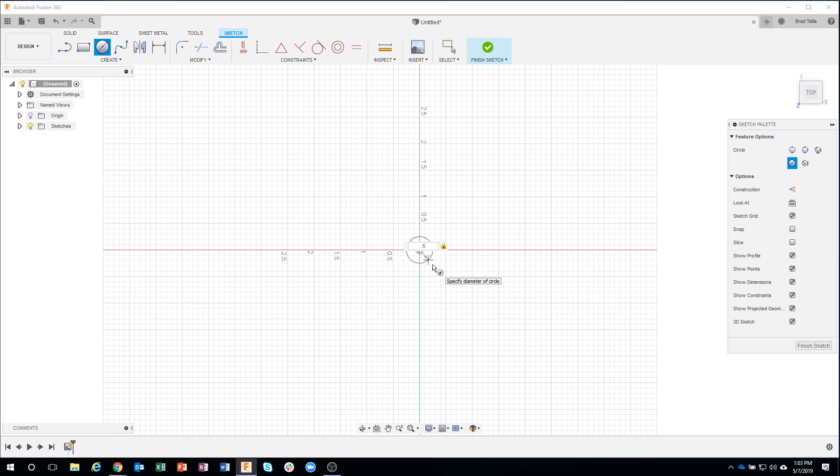So the first thing I'm going to do is, let me jump into Fusion. And I'm just going to start by creating a quick sketch. And I want to create a 1/2-inch diameter bolt, for example. So I'm going to start by just creating a circle. And I'm going to make this 0.5 in diameter. So I type in 0.5, I'll say okay. Let's go ahead and extrude this guy up. And in this case, I'm just going to go like 1 inch, for example. Okay.

Under the Create menu, we have this Thread command. And when I click on Thread, I can go ahead and select this cylinder. Now watch what happens when I do this. So you'll watch what happens over here. When I click on this cylinder, it actually figures out the closest manufacturable thread. So for example, in this case, I'm in inches, but if I were in millimeters, this would probably show up as a metric thread type. You can see that it determined that a 0.5 is about the closest.

And then we have different designations. So you can kind of see we have 1/2-inch 12 UNS, 1/2-inch 13 UNC. So I'm going to go ahead and do this 13 UNC, and you'll see that this preview updates. Let me go ahead and change it to something like 20. You can kind of see how that updates.

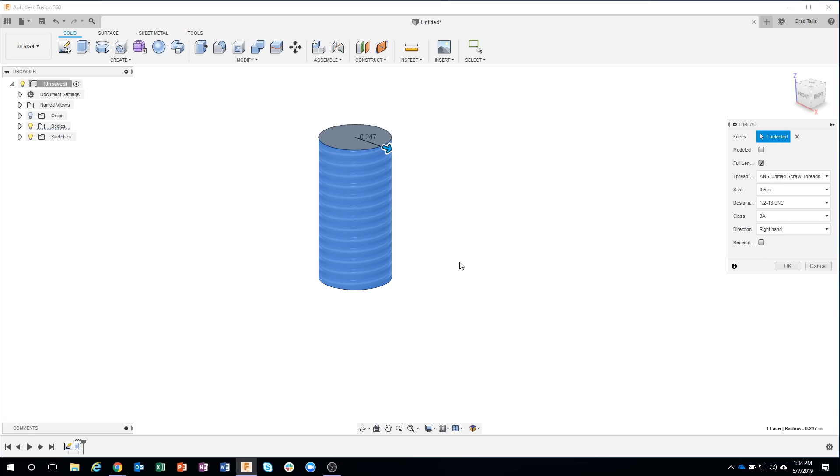Now, if I were to say okay right now, this is just a decal. It's just a sticker, basically, a representation of threads. Now, why would we want to do that? Well, when you have complex designs that might have lots of threads, you wouldn't want to have all of those modeled, but you might want to show that those are threaded rods, for example. So we use this kind of almost like an image.

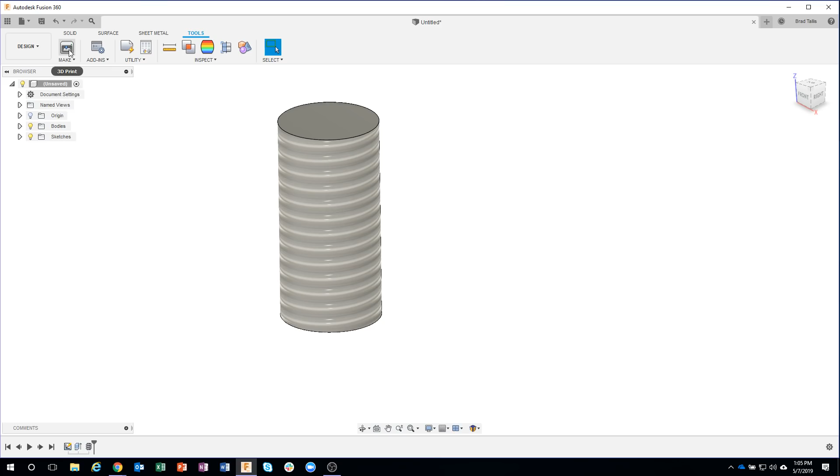However, if I were to come over here and say make and try and 3D print this, all I would get would be a cylinder because there's physically no threads there. Okay, I'm going to go back into my thread feature in my timeline.

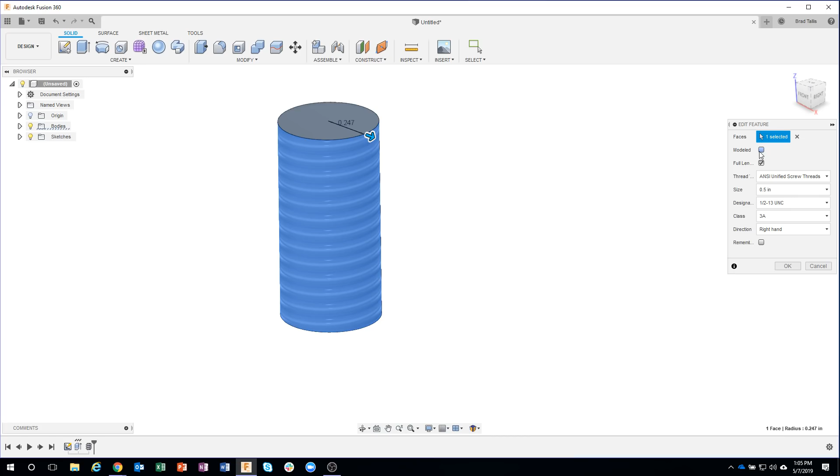Again, I'm ANSI Unified, 1/2-13, but you'll see right here it says modeled. If I click on that, it's going to physically model the threads. Now, by doing that, we've added a lot more edges, a lot more faces, and this is what I was talking about earlier. If we had a lot of these in our design, it could potentially slow down our session of Fusion. So actually model the threads only on the ones that you really need to have modeled.

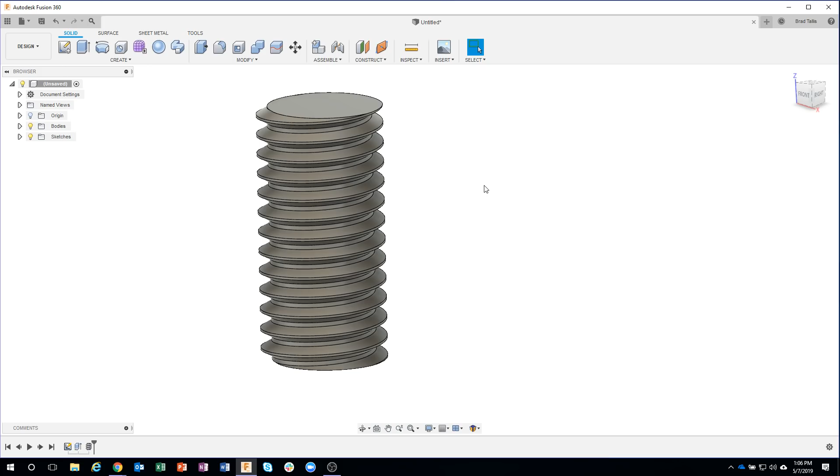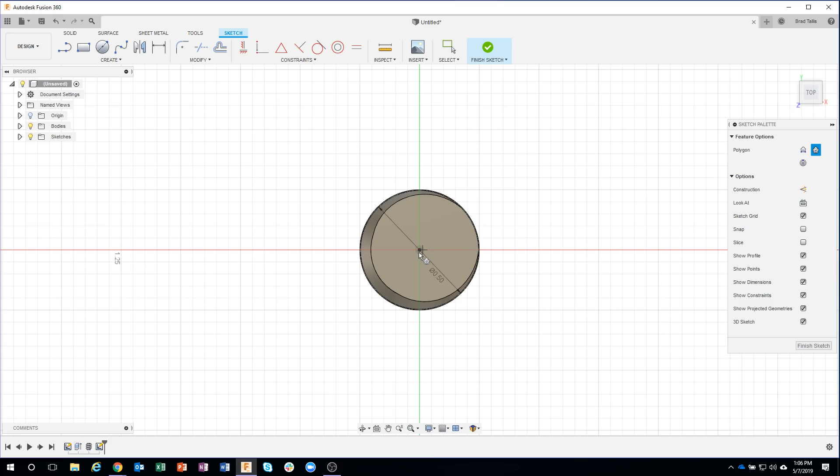Okay. So I'm going to do that again. This time I'm going to create a sketch on that plane. I'll do another circle here. Let's just do a half inch. And then I'm going to use a cool command in here called polygon, circumscribed polygon. What this allows me to do is start in the center, and you can see that it's going to basically create a polygon that's circumscribed around the radius of our circle here.

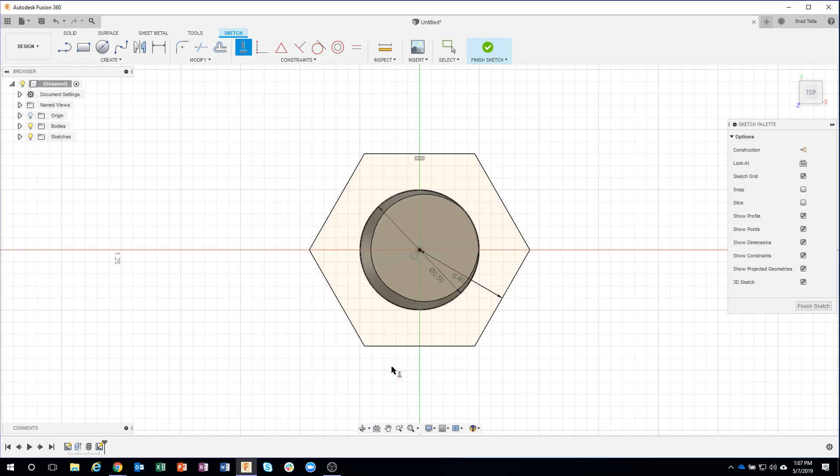So now I can make this nut whatever size I want. Let's just say 0.4 in this case. I'm going to go ahead and just hit enter, and you can see it created a 6-sided polygon. Now, the anal retentive part of me likes to have this horizontal, so I'm going to come in here and say horizontal, and I'll just click on that top edge, and you can see how it rotated it to be horizontal, and we are done with our sketch.

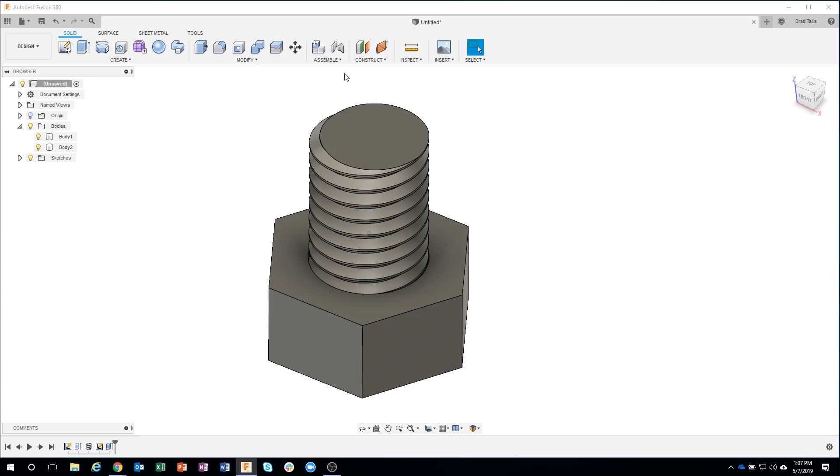I'm going to go ahead and turn this body off. Let's go ahead and extrude this up. Let's just go maybe 0.375 in this case. I'll say OK, and I'll turn this body back on. Now, if I were to section through here, we're going to see an issue. So I'm going to say section analysis, and let's just slice through. And you can see that sure enough, I have the threaded rod, but the nut itself is not threaded.

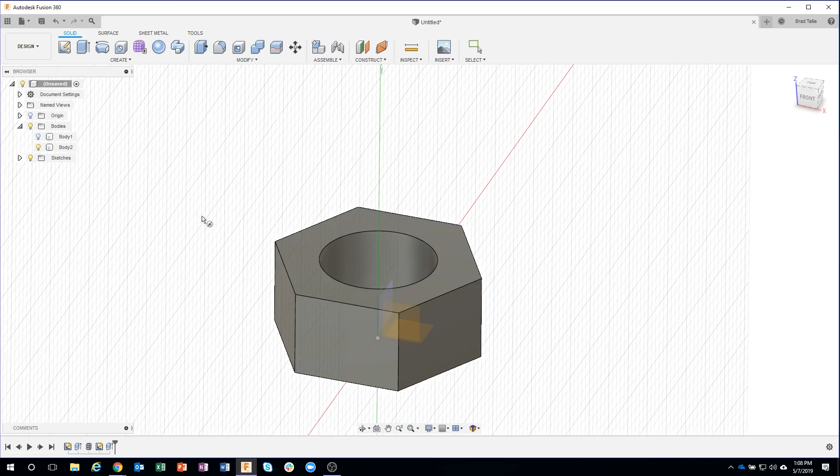So let's go ahead and do the exact same thing. I'm going to say create a thread. Notice size is set to auto, designation set to auto. I'm going to click on that circle, and check this out. I'm going to undo so you can kind of see this. Watch the size of the circle when I do this. Oops, I meant thread, not coil. So watch the size of the circle. As soon as I click on that circle, you see that it actually got smaller. And that's because Fusion is smart enough to figure out how to make it the drill size ready for the tap. So it does all of that for you.

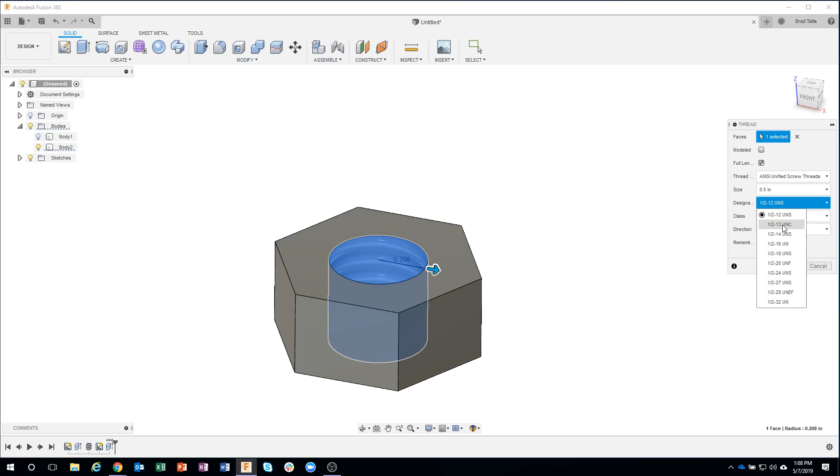So again, half inch. Now I want to make sure I'm doing the 1/2-13. And again, I'm going to say modeled because I'm going to 3D print that nut. I'll say OK, and we now have this nut. Let's go ahead and turn this back on again, and I'm going to section through it. Okay, so something like this.

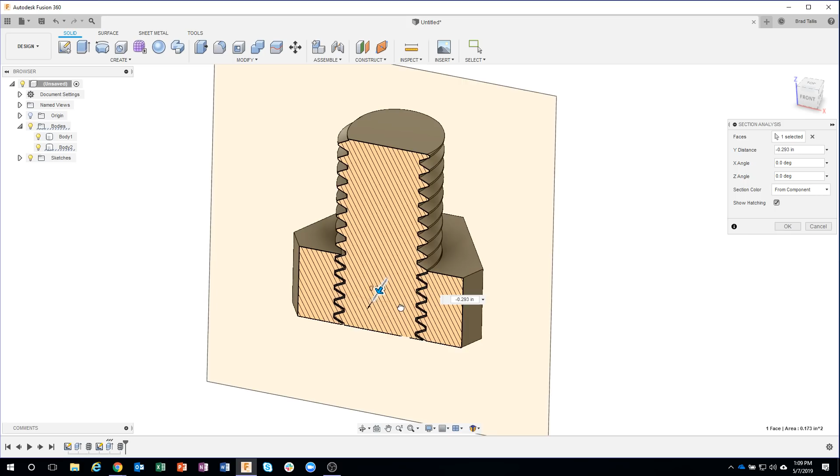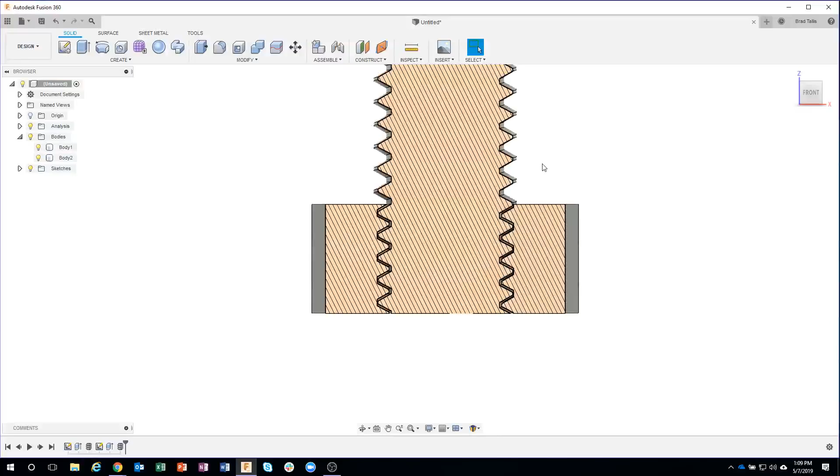Now here is what I really like about Fusion 360's threads: you'll notice that there's a bit of clearance in here. And at least on my 3D printer, this seems to be the perfect amount of clearance. Like I showed on this guy, this is pretty much the exact same example. I didn't do any modifications, and I wish you could feel how perfect this is, but it literally just screws in very easily, and there's absolutely no slop. And the reason I'm pointing this out is because I'm going to do the exact same thing, but this time I'm going to import some models from McMaster-Carr.

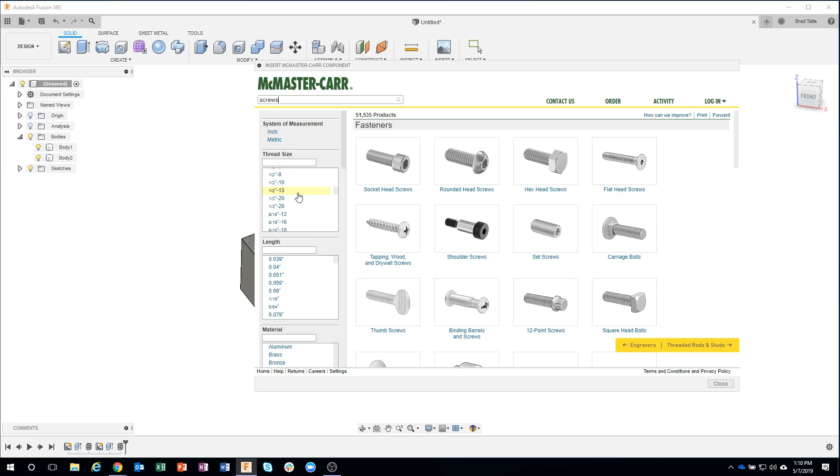Okay, so let's go ahead and come under Insert, McMaster-Carr. And I'm going to make this a little bit bigger. I'm going to click on screws and bolts. I really like how McMaster-Carr has this set up. I can scroll down here and let's just do 1/2-13, for example. Let's do the hex head screw, and I'll do maybe 1.25 inches in this case. Okay. I'll click on this product detail.

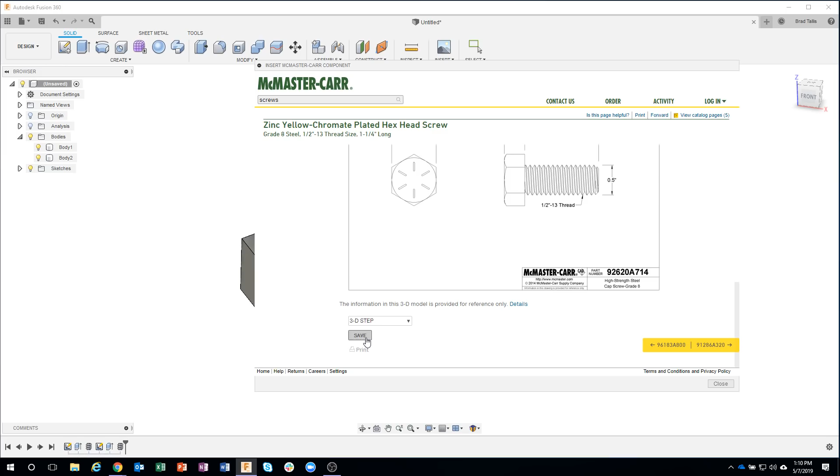Anything that has this little CAD symbol next to it means there's a 3D model available. Actually, even more than 3D models. There's drawings, 3D models, etc. So I'm going to just say save. And it's going to bring in the McMaster-Carr one, which I really like because you can even see the markings on it. It's got the cool chamfers, etc. Whereas in my example, I just did one really quick. Not that exciting, right?

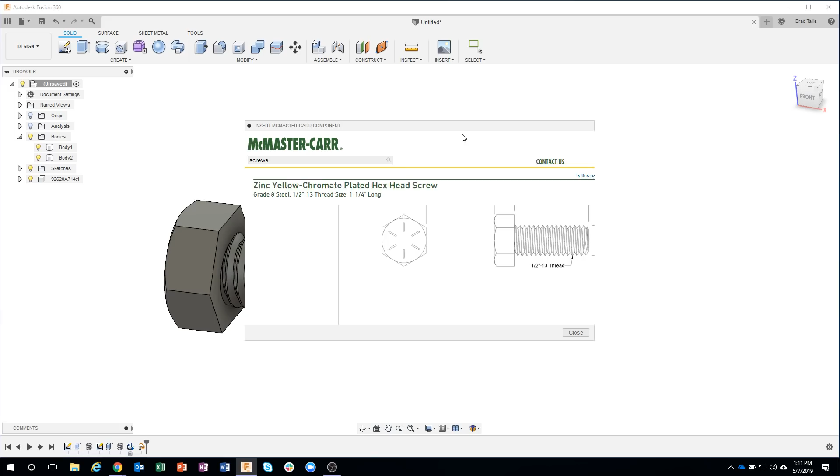So let's do the exact same thing. I'm going to insert another McMaster-Carr component. This time, let's do a 1/2 inch nut. Let's just do a hex. And let me scroll down here just a little bit. I'll do a 1/2-13.

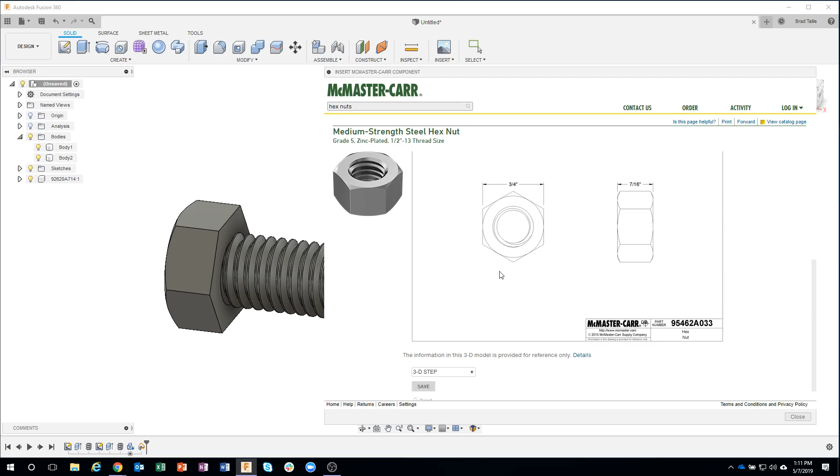Do the exact same thing. Here's a drawing of it. We're gonna save it as a step file. And I'm gonna pull that out over here so we can kind of see it's in the wrong orientation. But I can fix that really easily. So I'm just gonna kind of rotate this around.

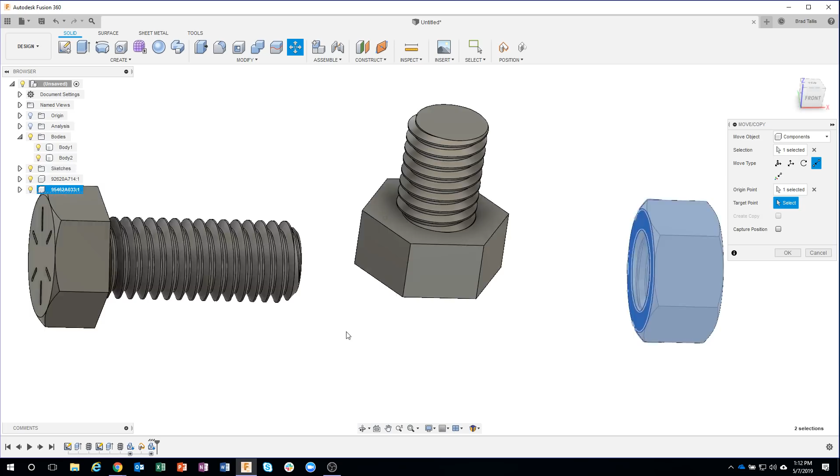And I'm gonna cheat. I'm gonna do this point to point. I could create a joint and all that kind of stuff, but in this case, I'm just gonna hover over this face. And you can see I can grab this little center point right here. So I'm going to click on that center point. And then I'm going to do the same thing over here. I'm going to hover over this face and grab that center point. And just that quickly, I was able to move the nut where it needed to go.

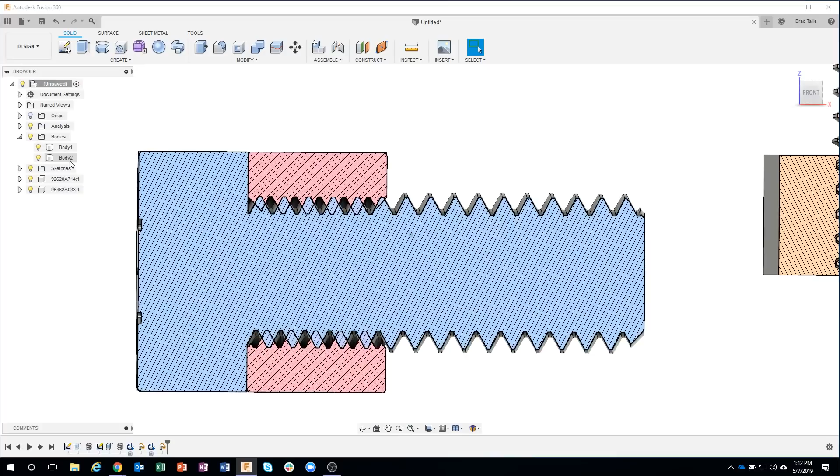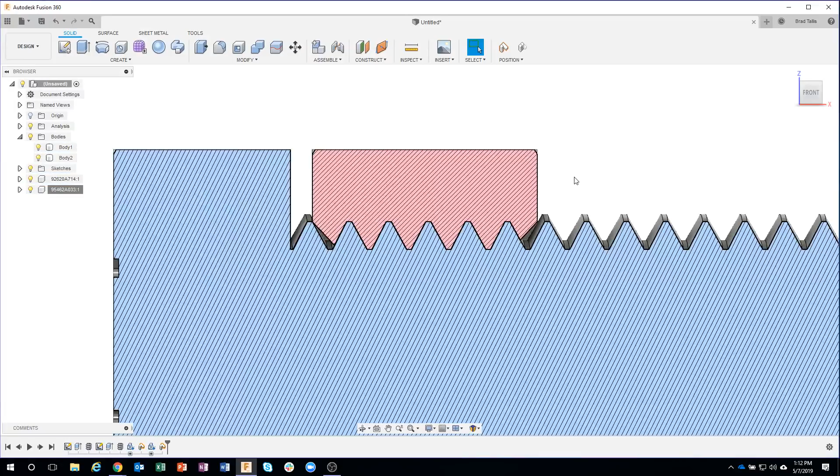Okay, so let's go ahead and turn on our analysis again. And obviously, they're not lined up. So I'm just going to drag this over really quick. Let me just look at it from the front view. And I'm just going to sort of line up these teeth, just as a visual right now. Now this is what I wanted to point out. I can't really use my arrow, but notice how tight those tolerances are compared to what we get over here.

So my first tip is I personally like using Fusion's thread command. Now I am going to show you how you can bring in McMaster-Carr components and put Fusion's threads on there. That's the next thing I'm going to show. But if you just bring in parts from like McMaster-Carr or maybe from a customer site, you might want to do a sample print first before you print the big huge object. I might try printing one of the nuts or the bolts from that particular customer and see how well it fits, and do we actually have to modify it. So that's my first tip.

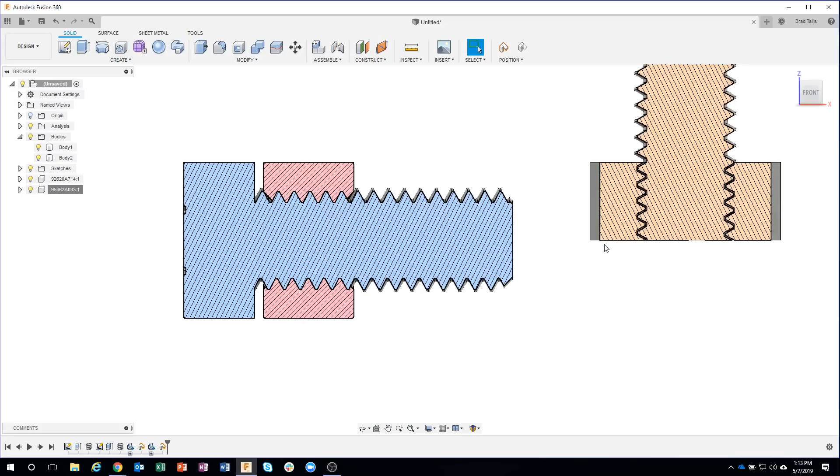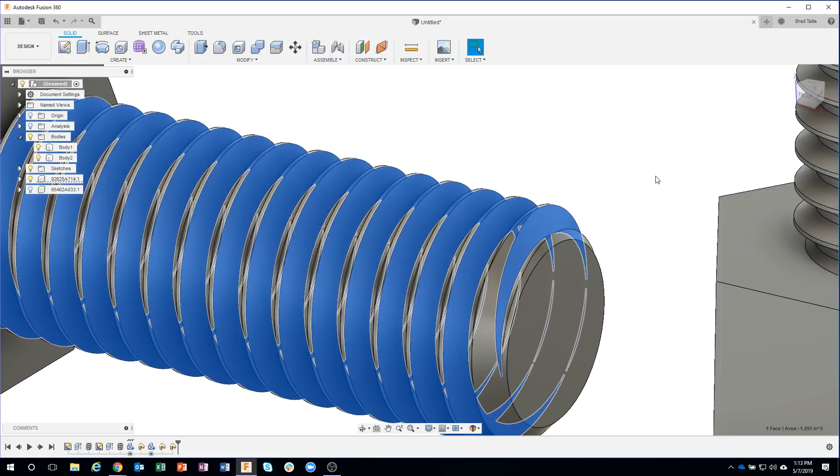Okay. Now, I mentioned that you can actually modify these, so let me go ahead and talk about that. So I'm going to turn off my analysis, and let's just turn off this nut. So here's my McMaster-Carr bolt that we brought in, and I really like it. However, I want to basically recreate the threads on there. So I'm going to select the faces that define the thread. I'm going to grab those faces there, this face here, and then finally this inside face. I'm going to have to zoom up a little bit. So you can see I grabbed all of the threads except for this outside one.

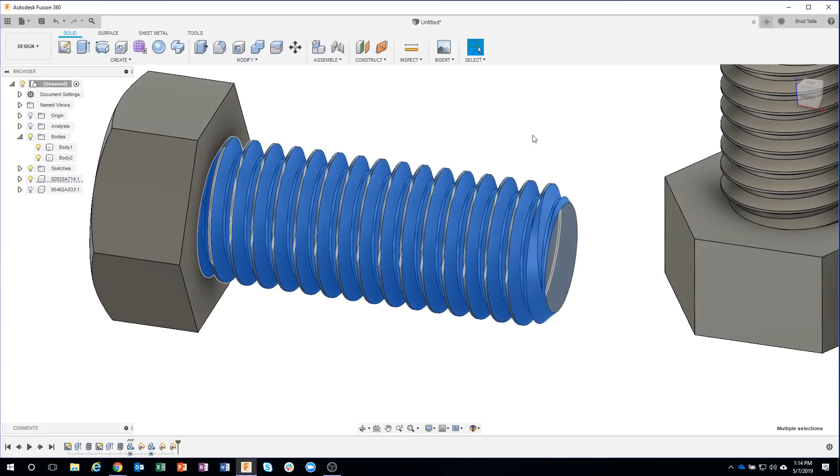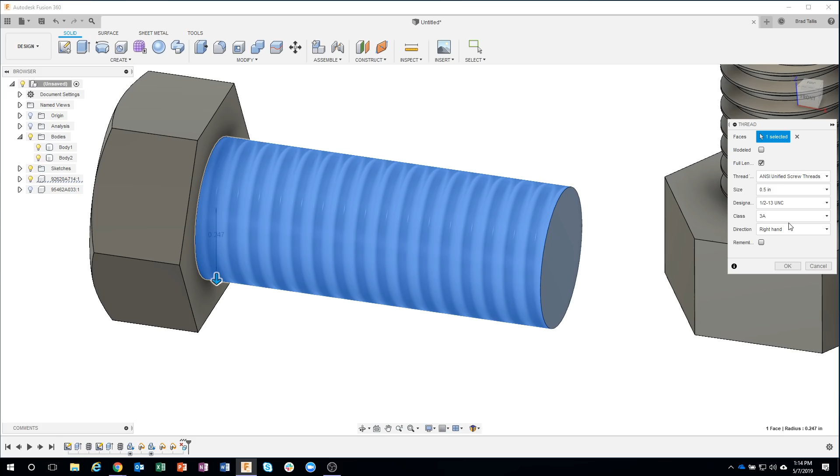Okay. Then all I have to do is say delete, and you'll see that it turns it back into a cylinder pretty quickly. So that's using the direct modeling techniques. Now I can come in and say, let's go ahead and do a thread. I'll click on there. Again, it recognized it as a 1/2 inch. Let's do 1/2-13, modeled, and boom, we're back to having a threaded part that's attached to my McMaster-Carr part. And I could do the exact same thing with the nut.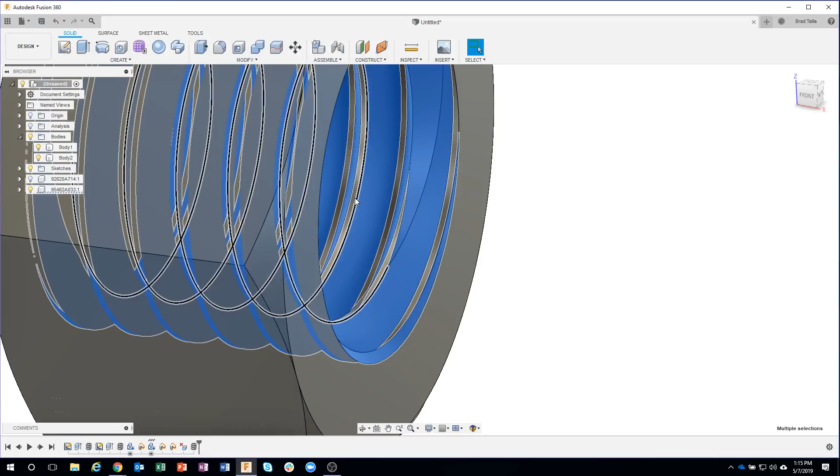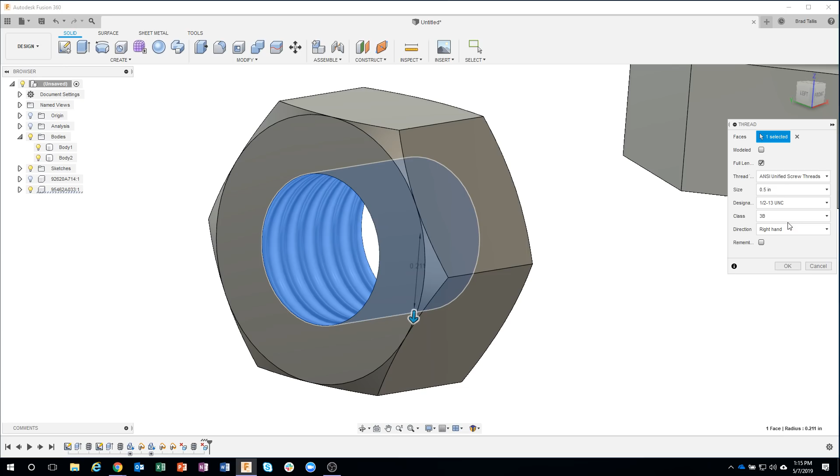So I'm just going to come in here, grab a couple of these faces. So I'm going to grab that guy there, that one there, and let's say this inside. Let's do this guy here. Okay. I might rotate around, make sure I get all of those thread faces like so. I'm just going to hit the delete key on my keyboard, and we're back to having an unthreaded nut. So let's go ahead and say thread, 1/2 inch, 13, modeled.

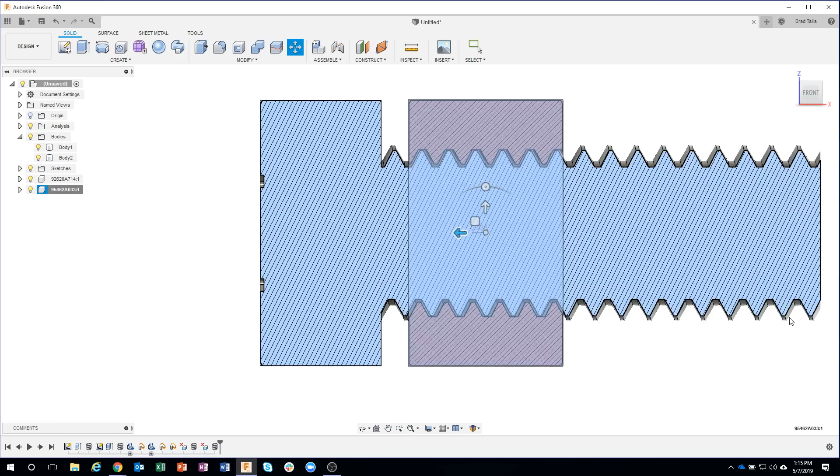Let's turn these guys back on. I might have to move the part. Let's go ahead and do an analysis. Yep, I'll have to move it slightly. But let's take a look at the clearance now with these new threads. So you can see, sure enough, we have much better clearance just by recreating those threads.

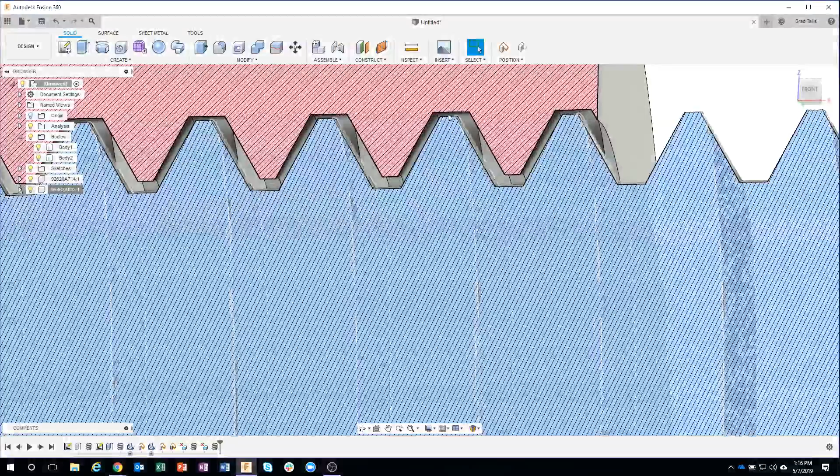Now, let's say you did a sample print and they were still a little bit snug, you can actually modify your 3D model. So for example, on this nut right here, I could come in and grab maybe this face here. I'm just going to do a press pull, and I can move those faces up a little bit. So you can see how I'm moving them, 0.003, and I now have more clearance. So you can again use direct modeling techniques to slightly change what you want those threads to look like for that extra clearance. Okay.

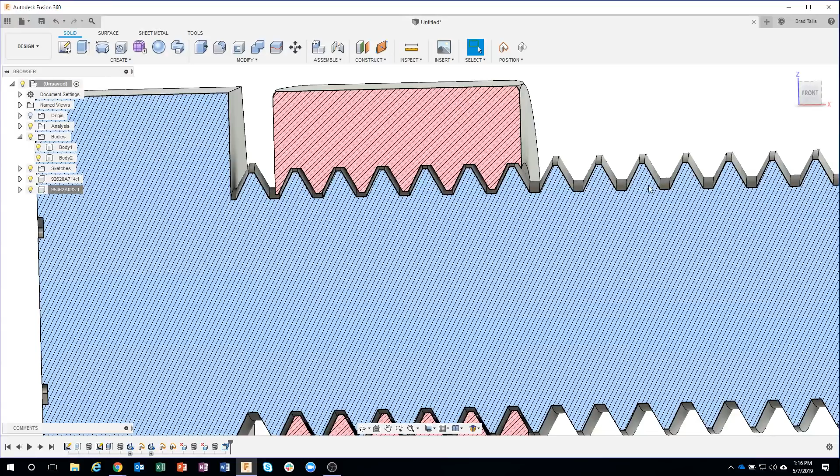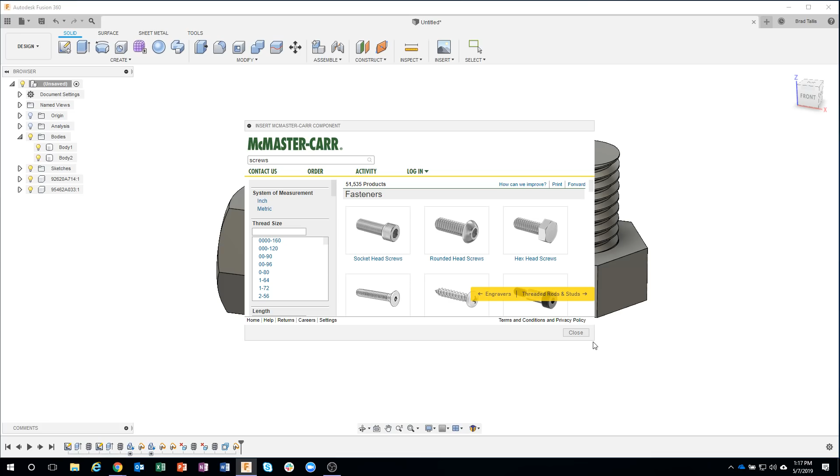Hopefully that makes sense with the thread command inside of Fusion, and also using, for example, a McMaster-Carr part. And like I showed, this works with anything from McMaster-Carr. So I could come in and say, for example, I want a socket head cap screw, something like this. And again, all of the different sizes are in here.

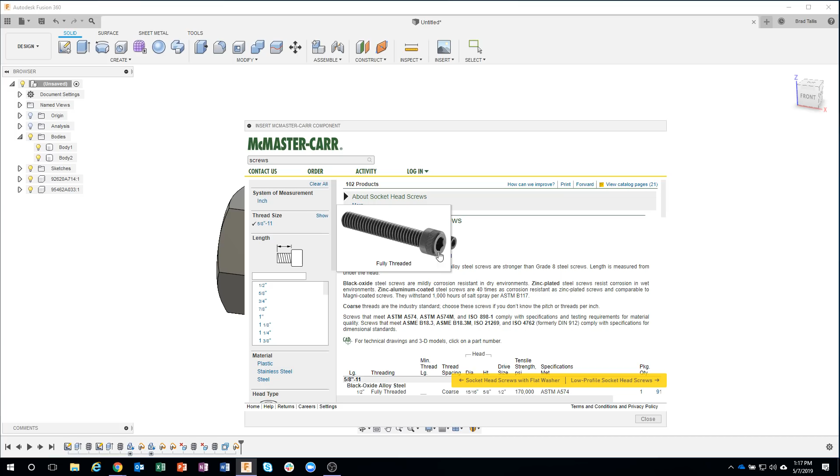Okay. And I could delete those threads off of there. I'm not going to go ahead and do it, but it works for pretty much any of these parts, where I wouldn't want to have to model the head geometry. I could just bring it in and then recreate the threads if necessary. Okay.

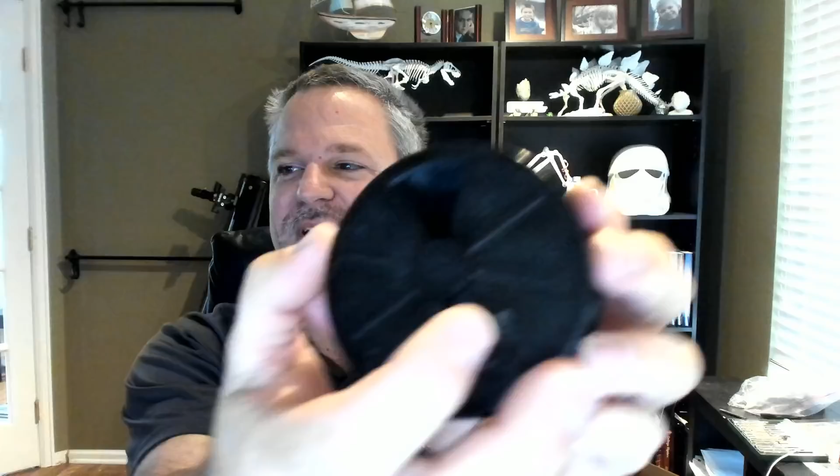Okay. So here's a prime example. Here's an object I printed, and I don't know how well it's going to show up on the camera. I apologize. This is actually a pill holder. You can rotate this around, and you can see there's different openings in there. I have to look at my other monitor to see what's going on. And it's got labels on it, Wednesday, Thursday, Friday, etc.

So I'm going to unscrew this, and you can see that I actually 3D printed this. So there's the little thumb screw, and it just screws into this little interior post in there. Okay. So how do you go about making sure something like this is going to last? There's a couple different tips and tricks with this.

So the first one I want to talk about is when you print a bolt, you can't really print it sideways, because then you'd have to have support material right here, and that would probably get in the way of the threads. So you typically have to print vertically. Now, unfortunately, when you print vertically, all of the layers are going on like this.

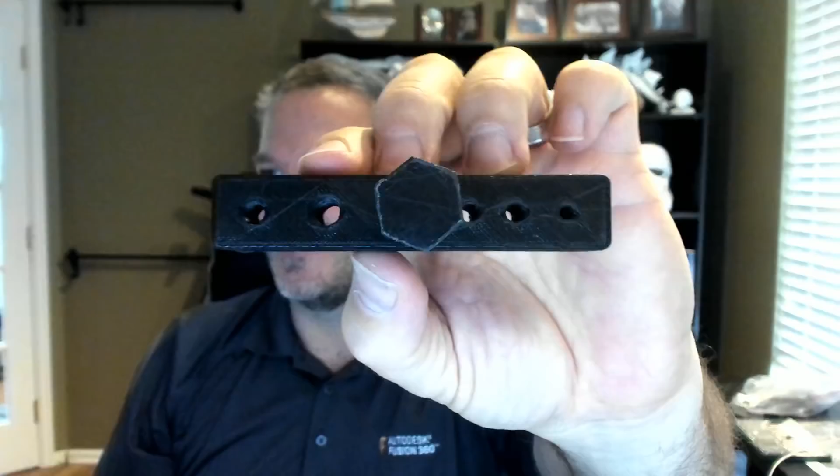So let me just do a quick example here. I'm going to unscrew this. I have a sample block. Let me zoom up on this. You can see I've got a couple different sized holes in here: a large hole, medium hole, and a small hole. And this is what I was talking about, where I'll print a sample block that maybe takes 20 minutes to print, and make sure that my 3D prints actually screw into there very easily.

If it's too tight, I run the risk of breaking the bolt. So I usually print out a couple sample holes and a couple sample bolts first to make sure it's going to work. Now what's neat is I can even use actual machine bolts and screw these in also. So that would actually screw in and work instead of using a 3D printed one.

So if I'm using real hardware, I will, again, do a sample print, make sure that it fits correctly, and check whether I need to offset some faces slightly or not. But in this case, it worked perfectly. I used Fusion 360's thread command to do all of these, and I'll be honest, no modification whatsoever on any of these holes; I didn't have to offset any faces. It's beautiful. You can tell I'm excited about it. But you can see that's definitely in there.

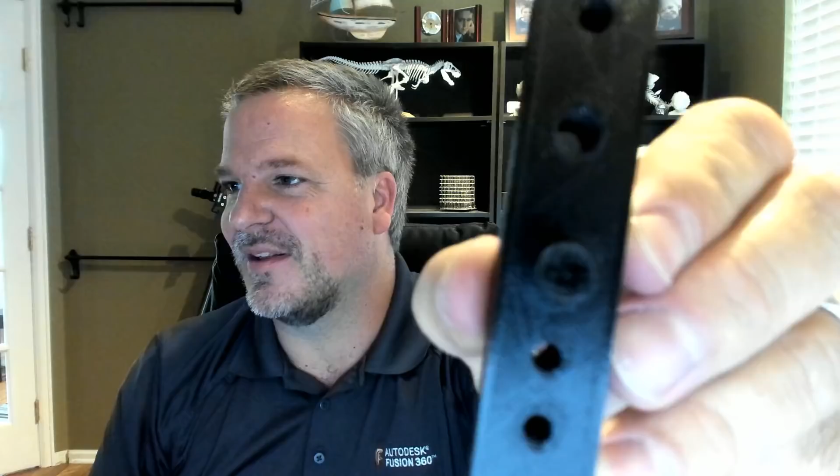Also, and I don't think you're going to be able to see it, but I didn't do a solid infill. Yeah, it's not going to focus. I apologize. So it's not solid in there, and that probably contributed to it being able to break so easily. So I'm going to show some other options for you. You can absolutely 3D print the threads and the hole.

Another tip is when you're printing threads, I recommend printing at a finer resolution. For example, 0.1 millimeter layer height instead of 0.2 or whatever you typically have yours set to. When you're printing threads, you might want a tighter, finer resolution, just because it's having to do those spiral threads. So that's another tip: I increase my layer resolution.

Another tip that I usually do is after I've 3D printed, I'll take an actual bolt or screw or whatever and thread that in there to help clean it out. Okay? Instead of using my 3D printed one, which could potentially break, I'll use an actual one that's the right size and thread that in there to help clean it out. Okay? And you can see that goes in very nicely.

Another thing I'll do is, I should have had it ready, you can even use an actual tap and die. So this is like what you would use to tap a metal hole, for example. It's got threads on it, and I could stick that in there. I should have it on the handle, but I might run this through and actually clean out my threads using the tap. So especially if I know that I might have to be screwing or unscrewing this particular hole quite a bit, which is exactly what I did on this little 3D printed device that I did.

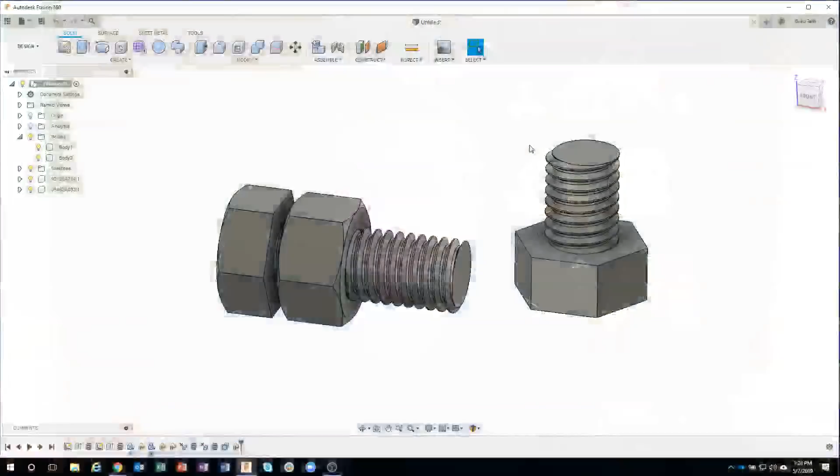The last thing I want to show is what if you need to create custom threads. So let me clean up my desk here a little bit. Let's go ahead and start with a new design. And I'm going to show you how you can create some custom threads. And again, there's probably multiple different ways of doing this, but I'm going to show you just one method that I've used in the past.

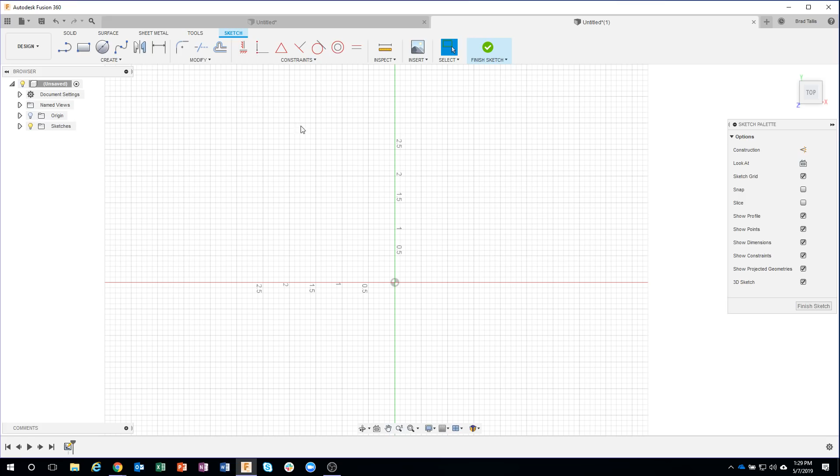So I'm going to make this one a little bit larger. Let's do, for example, a 1-inch diameter, like so. And I'll go ahead and extrude this, and let's just go maybe 2 inches tall in this case. Okay. So this is pretty much the envelope of the size that I want to create these custom threads. We're going to learn a new command in here called coil. So I'm going to say create coil.

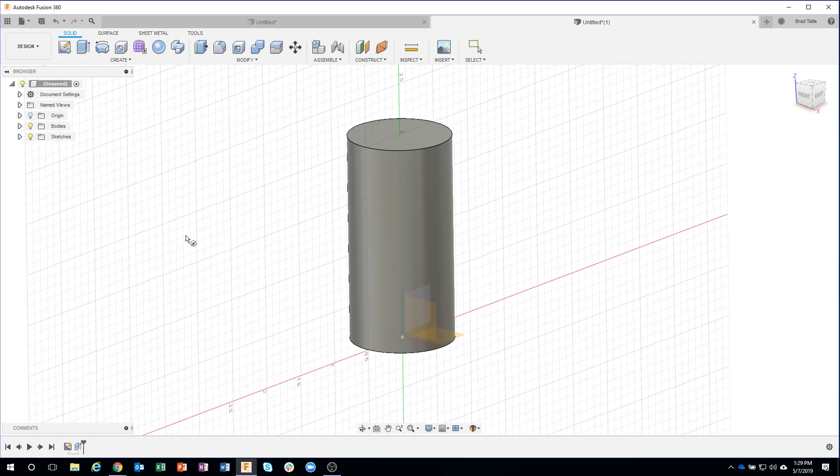First thing it's asking for is which plane or face do you want to draw it on. So I'm going to start down here on the bottom. And then it's asking for a size. So I'm basically going to trace over. I could type it in or I could just click, and you'll see that I get this interesting result here. Okay. Now I'm going to change the direction of it. Let me do that again. Create coil.

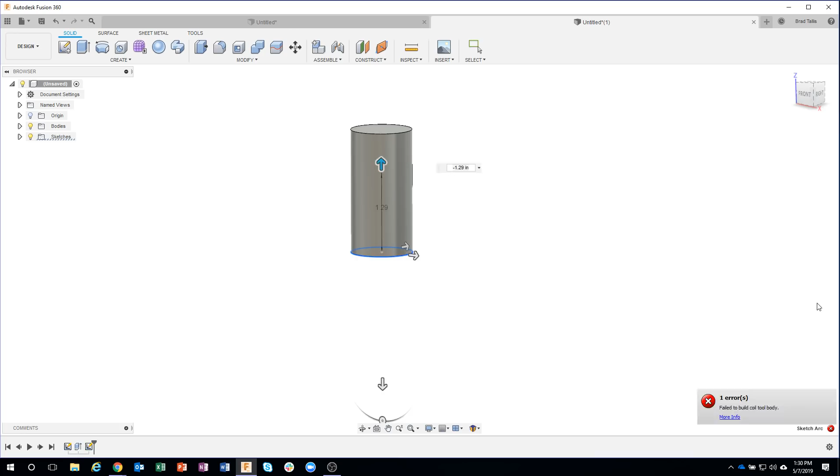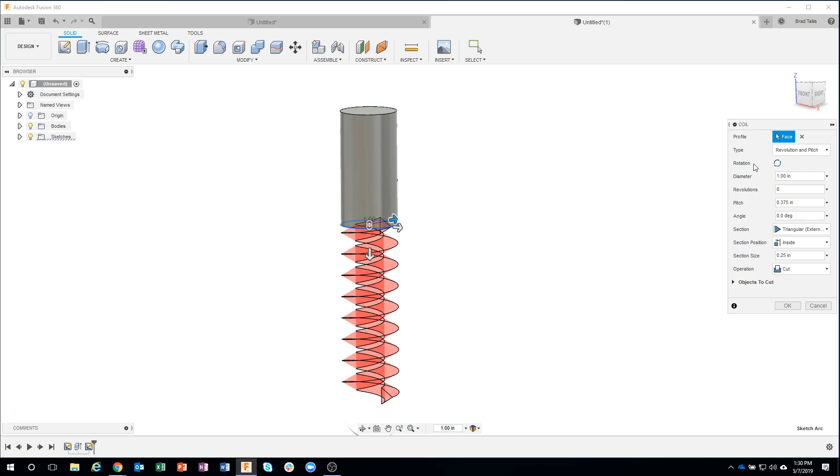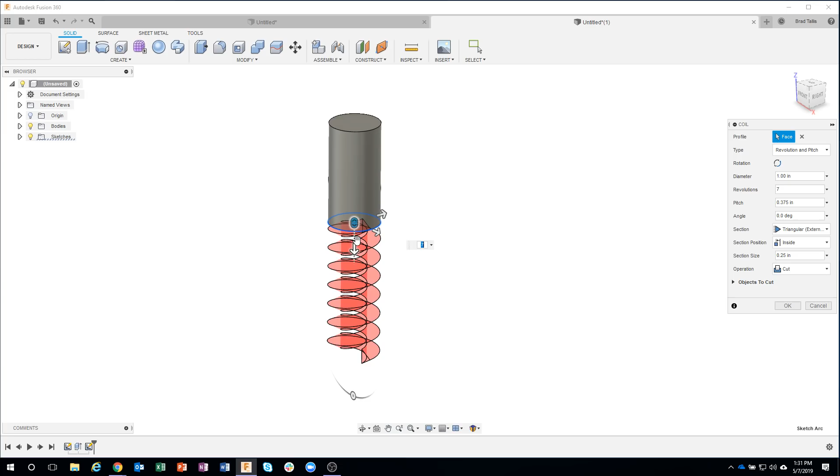And I was going to try and set everything to the default here. So usually it's set to revolution and pitch. And then you can kind of see, for example, nope, wrong. Try and make it go in the up direction. I did this earlier, but I'm not sure why it's not doing it. Let me see if, no. Come on. There we go. I must not have clicked correctly.

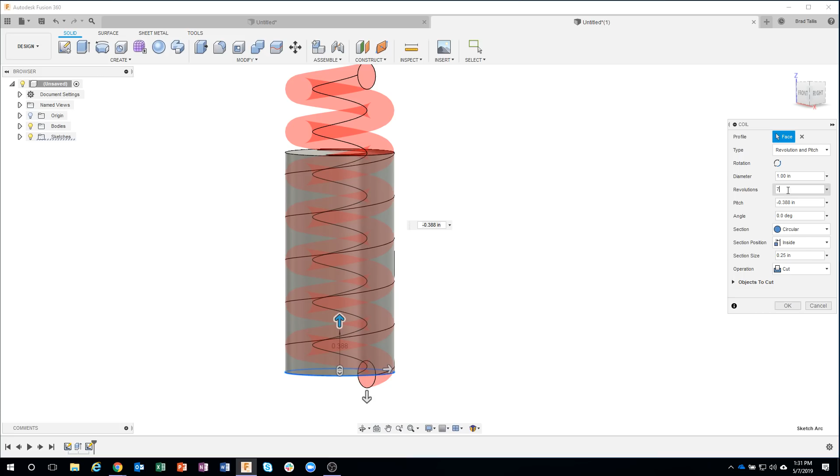Okay, so by default, it's usually set to circular. And you'll see that we get this red preview going on. What it's basically doing is it's taking a circular section and it's creating a coil. Now there's lots of options here, and I was going to kind of walk through each of these. So you'll see, for example, we have revolution and pitch. So I could specify I only want 4 revolutions, and it's only going to go around 4 times.

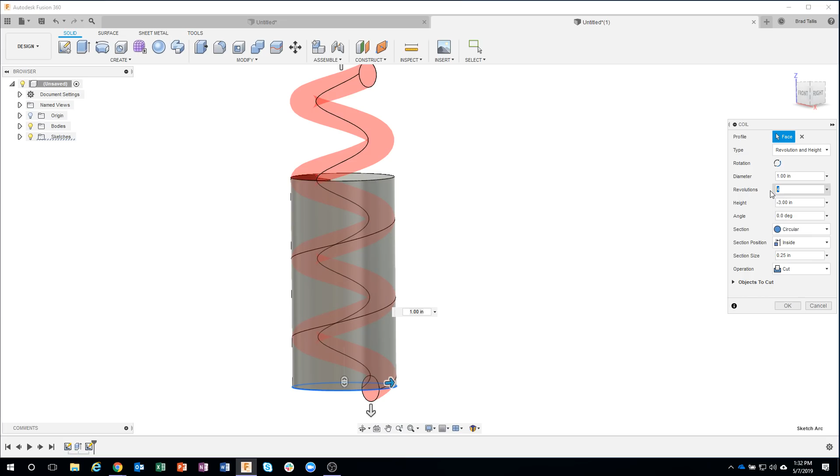I can also specify the pitch. So for example, I could say minus 0.5, and it's going to set the pitch to be 1/2 inch. If I said 0.75, it's obviously going to space out that pitch even further. Okay. We also have revolution and height. So I could say, for example, I want 6 revolutions over 2 inches, and it's going to figure out the pitch for me automatically, right?

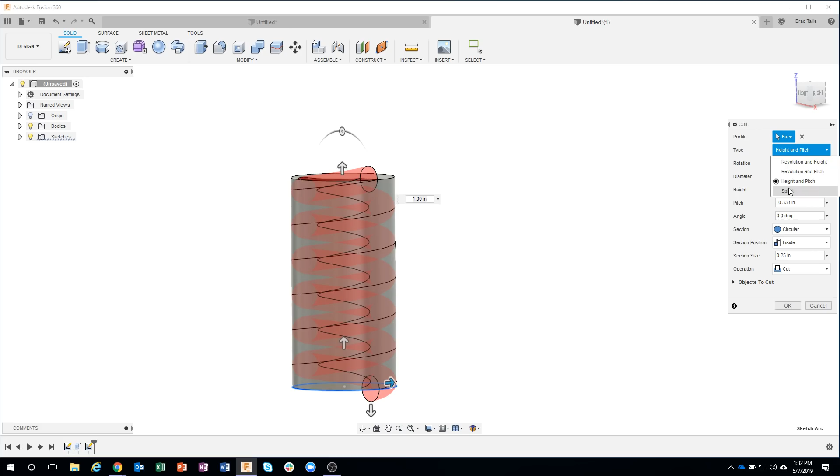If I said I want 4 revolutions, you can see how it's going to do that, but it's going to keep the height always the same. Okay. Then we have height and pitch, where you can specify what's the height, and then you can specify what's the pitch. And then finally we have spiral, which is just a spiral on a flat plane, which doesn't make sense in this case. So I'm going to do revolution and height in this case. I want 6 revolutions over 2 inches.

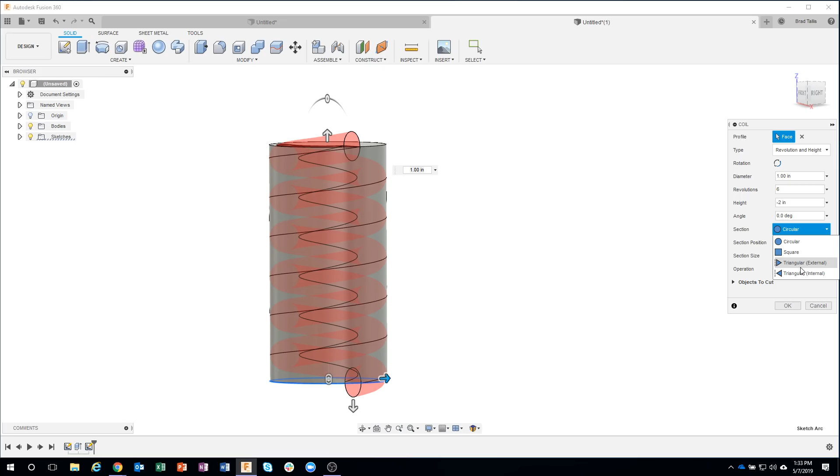Then you see we have this section, and right now there's only 4 options in here: circular, square, triangular external, and triangular internal. And you might be saying, well, how are we going to create these custom threads? Well, I kind of cheat. I'm going to go ahead and use, for example, this triangular external.

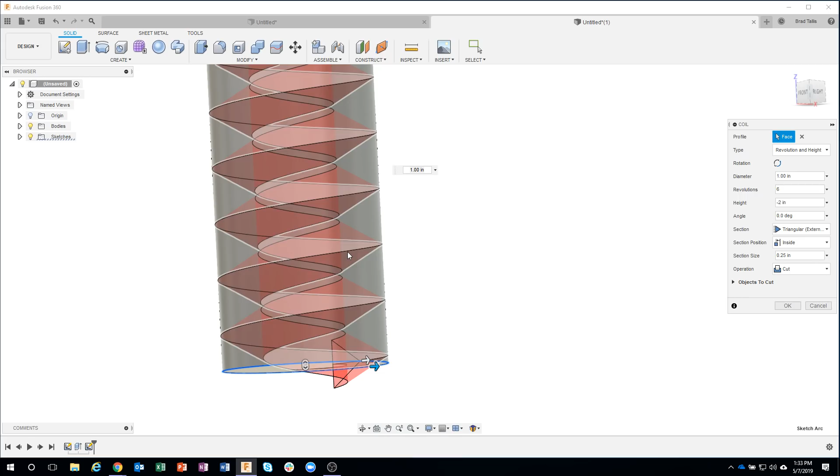And if we look really closely, we can see that the point is defining this little edge right here, this spiral edge, which is touching the edge of our part. It's kind of hard to see, but I'm hovering over the spiral edge right now. I'm going to move away. You can kind of really see it spiraling around.

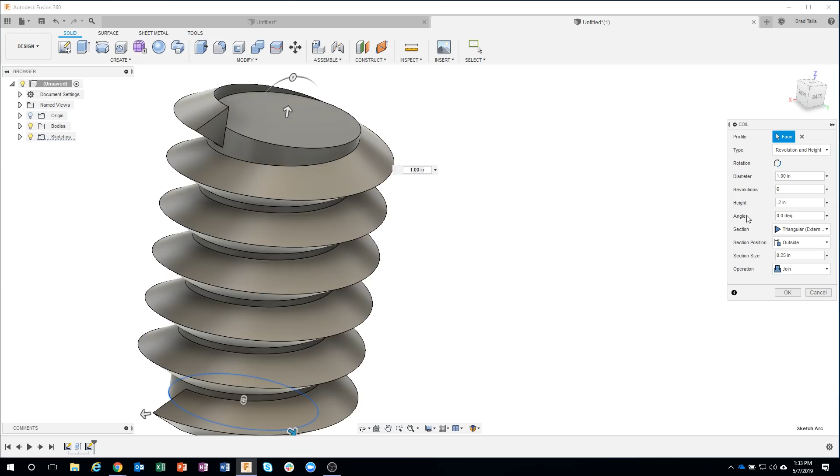Okay. Then we have options for on center, outside. So you're going to see how it's basically taking that profile and starting it on the outside of our cylinder. Or we have on center where it's in the center of it, or we have inside. And this is the one I'm going to use.

So basically what it's doing is I'm able to specify how many revolutions, how high do I want that to be, or I could specify, for example, height and pitch. Maybe I'm more concerned about the pitch of my threads, which is what you typically do. So I'm going to come in here and say I want the pitch to be, let's just say minus 0.35 in this case. And you'll notice it's going to change how many revolutions.

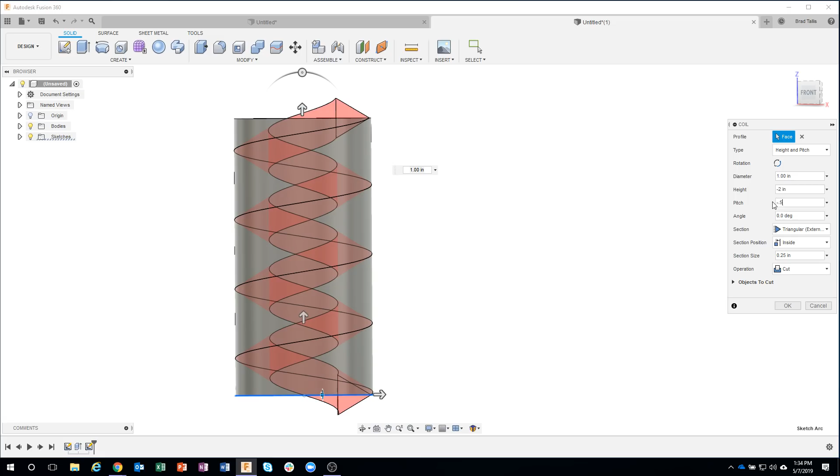So if I say 0.5, it's still only going the 2 inches tall, but I now have the different number of revolutions. Okay, so I usually use height and pitch because I'm really concerned about the pitch of my threads.

Okay, so I see Jason's asking pop quiz questions. Thanks for doing that. Hopefully this is all making sense to everybody, and thank you for adding your comments and questions in there.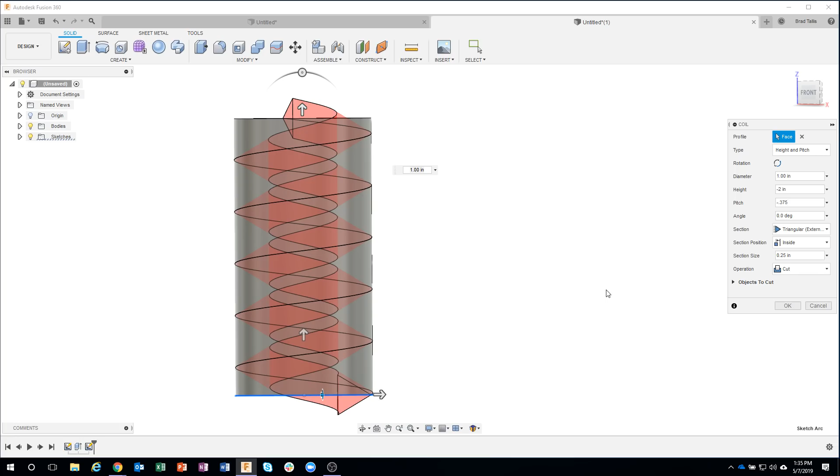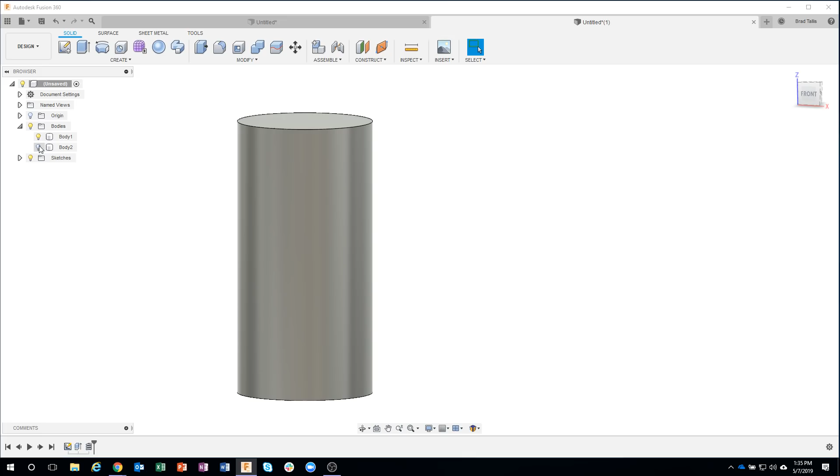So I'm going to go ahead and instead of saying cut, I'm going to make this a new body. And now you can really see the spiral. And if I were to expand open my bodies folder, you'll see that we have this new little spiral part. Okay. If I turn off the spiral, we see we still have basically the bolt that I want.

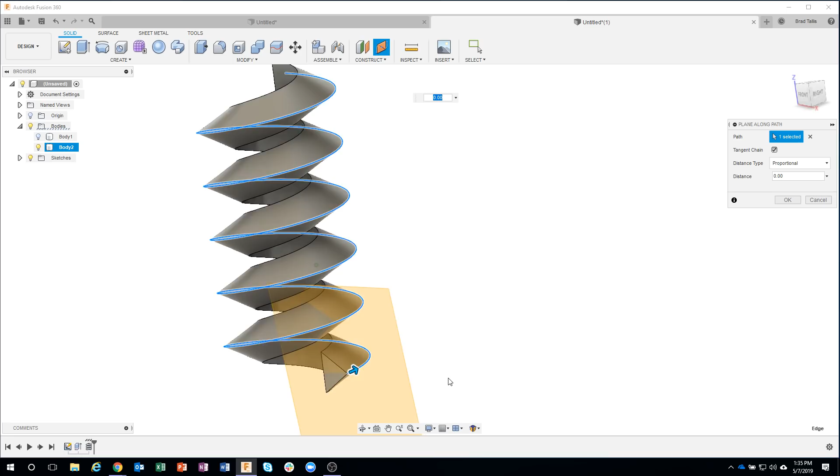Now what I'm going to do is create a plane along a path. And now you can see this path that we defined. I'm just going to drag that to the very end because I want to have this plane be tangent to the end of this line. So I just did a construction plane along a path. I've shown this command before in some of my other live streams. I use it a lot.

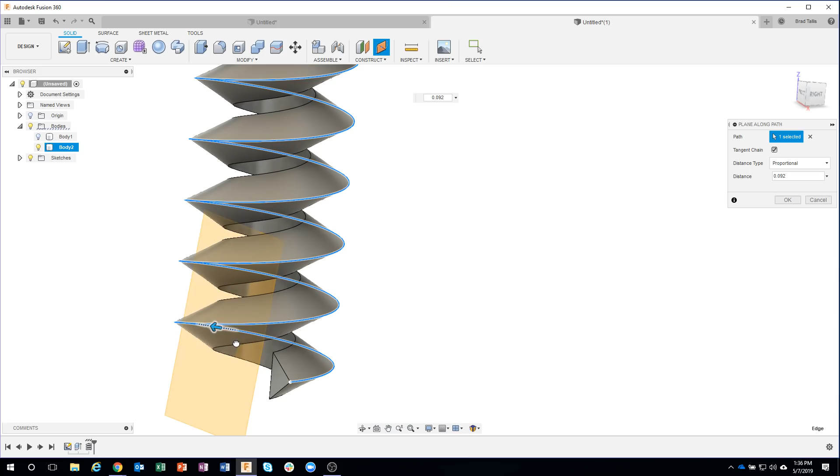And then I just clicked on the path, and then it allows me to place this plane anywhere I want on that path. So I'm going to put it down here at the very end and say OK. And now I have a plane that I can sketch on. So I'm going to say create sketch. And I'm going to do kind of a funky profile here. Let's do maybe like a slot. So I'm going to do a center. Let's just do maybe a profile that looks something like this for whatever reason.

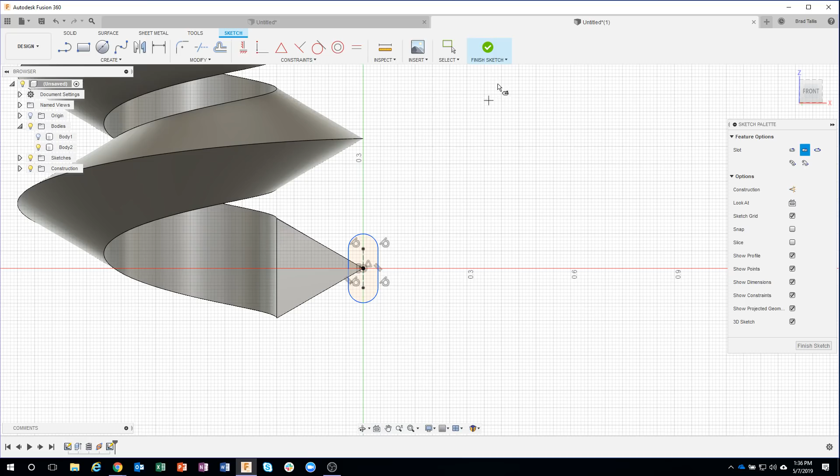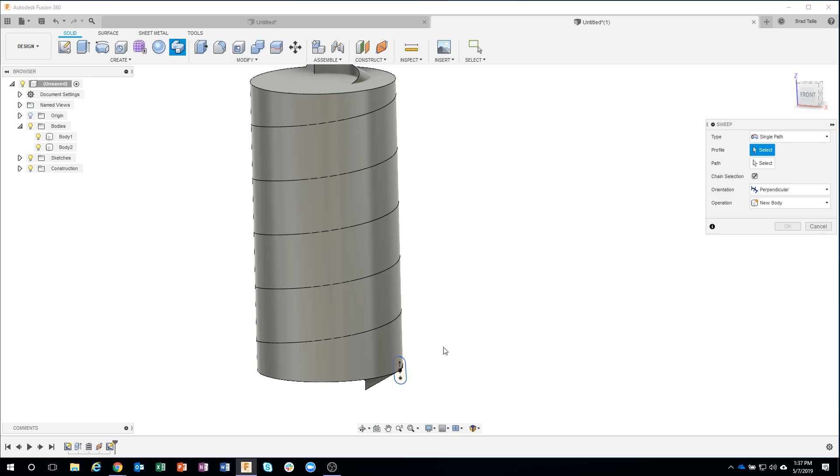Okay. So I'm going to turn my body back on, and now you can see that I was able to create basically a spline that goes all the way around my cylinder. I've got my profile on there now, and I can come in and say sweep. Okay, again by default it's usually set to single path. What's my profile? I'll click that as my profile. And then what's my path? I can click on the edge of this body right here. So you can kind of see how I was able to use that triangle to define that. So that's why I like to set it to the inside, because it kind of just creates that for me.

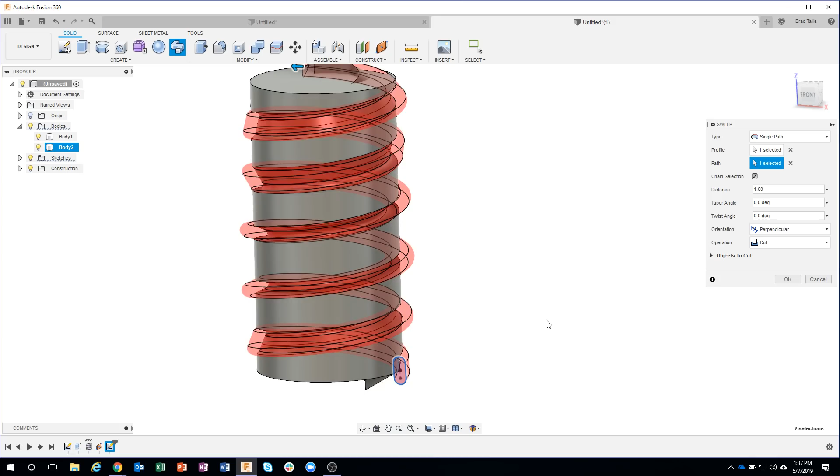Now, for those that are observant, you'll notice an issue here. Fusion's doing exactly what I told it to. I'm telling it to sweep this profile along that spline, but you'll notice as it does that, it's actually physically rotating it. You can kind of see it by the preview that we're getting. It's almost flipping it upside down by the time it gets to the top here. And this is obviously not what I want.

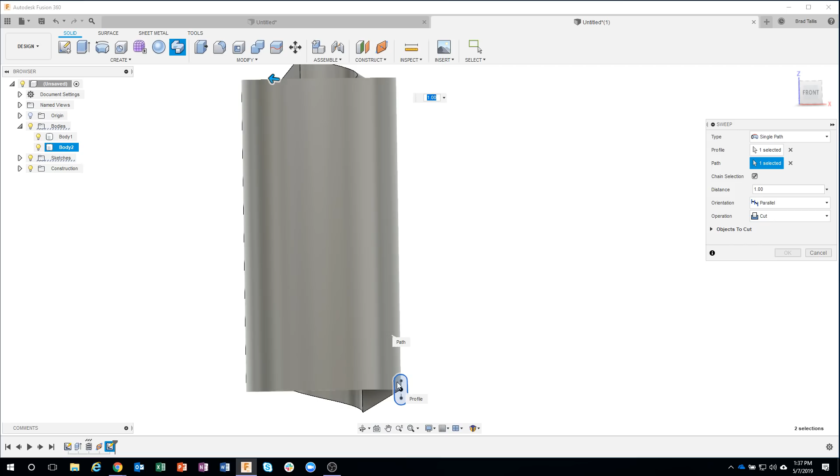I could come in here and say parallel, but that sometimes doesn't work. So you'll see, sure enough, it couldn't do that. Region of the path is not parallel, so it wouldn't let me do that. So I have to say perpendicular, but it gives me that weird result. Well, here's a neat little tip.

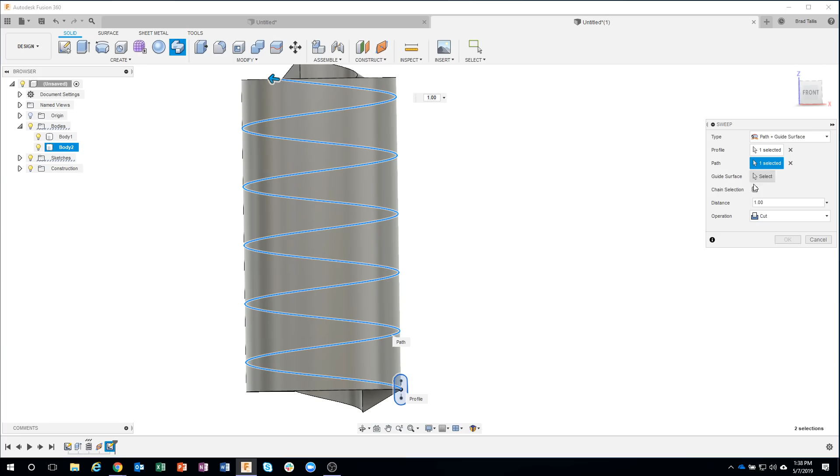If I go under the type, instead of just single path, I'm going to say path and guide surface. So I'm going to click on guide surface, and here's my profile, here's my path, and then the guide surface is going to be the cylinder there. And now you can see how it's going to keep that upright using this blue part basically as the guide.

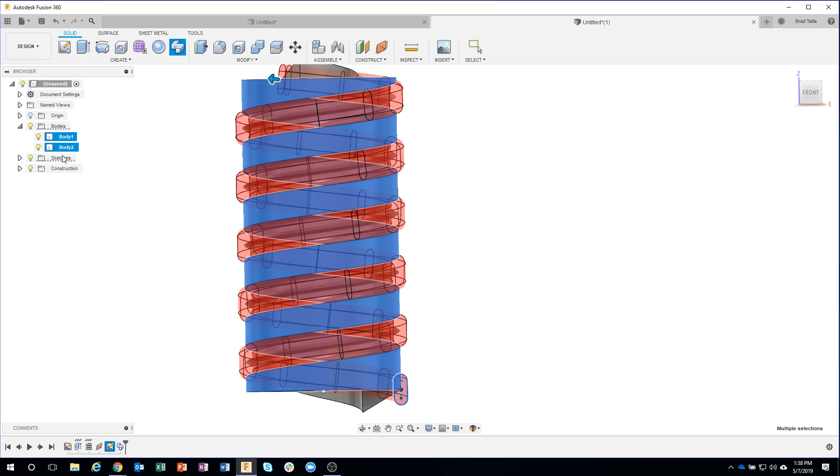And then the last thing I want to do is I want to make sure I'm only cutting my cylinder. So I'm going to turn off body 2 so it doesn't cut through the other one for me. And let's turn that guy off. And I now have a custom profile that's at the correct pitch, because I was able to specify I wanted 0.375 for my pitch. And so you can create some pretty interesting custom profiles.

Okay, that's all I really had for my tips and tricks for 3D printing threads. Just a quick review. I personally recommend, oh actually I forgot to show you one more thing, I apologize. I showed how fragile that one bolt was when I tried threading it in, and then it just sheared right off because we were printing layer by layer like this. But I told you, let me get a better bolt here, you can't really print it on the side because you'd have to have support material there.

Well, here's a neat little trick. You can actually print a bolt that, it's kind of hard to see, let me rotate it around, is actually flat, okay? It's only got threads on part of it. So there you can kind of see the reflection. So I was able to print this flat on my bed, and the layers are printing in this direction. So it looks kind of weird, right? But it actually still threads.

Oh, and I wasn't sharing my screen. Sorry, guys. Let me back up. Oh, the joys of live streaming.

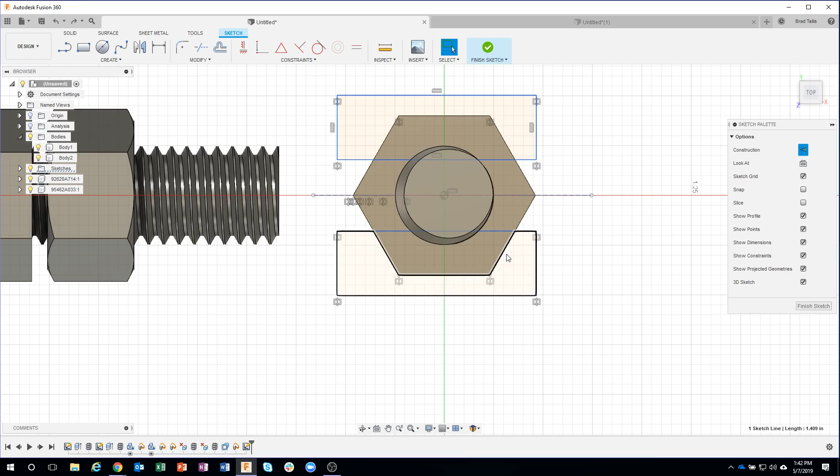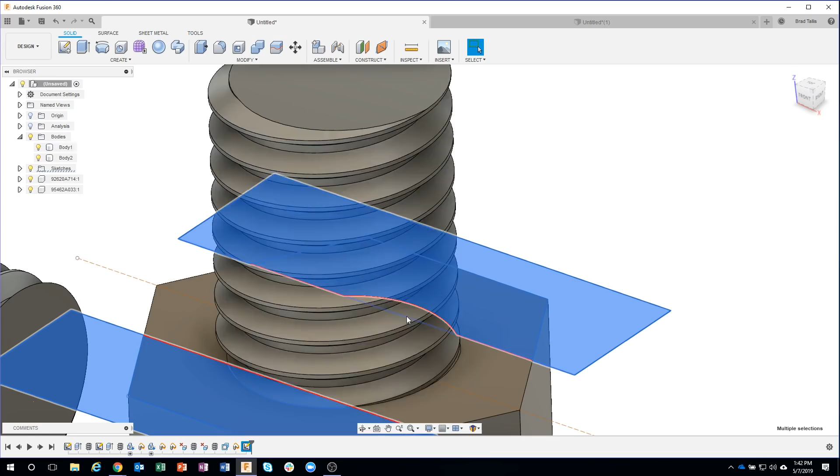Okay, so I just created a rectangle that overlapped the threads a little bit. I drew a horizontal line right here, made that construction, and then mirrored that over, and said finish sketch. Then I just selected my profiles that I want to machine. And again, it's hard to see, but there's a profile right here that's missing. So I'm going to click and hold for about a second, and I can probe through and grab that profile, and I'll say extrude.

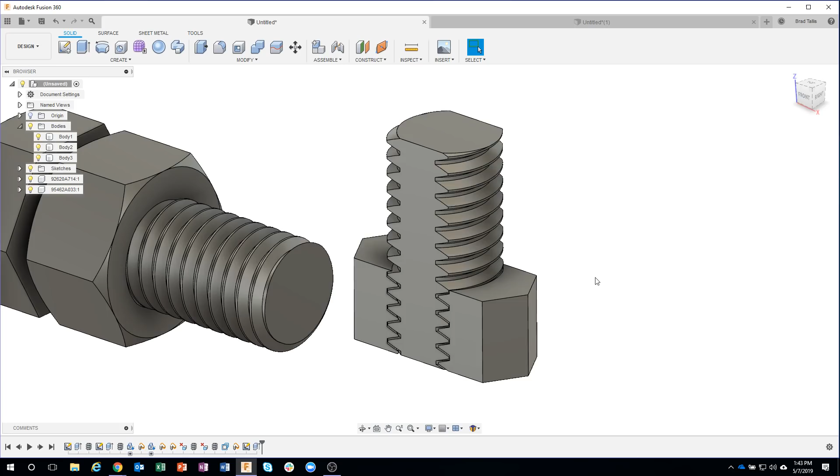Like so. And you can see how it's going to physically flatten that off. And then I'll do the same thing. I'll say symmetric, say okay. And of course, these are a nut and a bolt, but hopefully you get the idea. Now I could 3D print this flat. And there's still enough geometry here for it to print the threads on both sides. And it's going to create that particular shaped bolt that I showed earlier. And this totally works. So definitely recommend doing that if you can. It looks a little bit different, but it does work.

So anyways, I apologize for that little hiccup there. Hopefully these tips and tricks were useful for you.